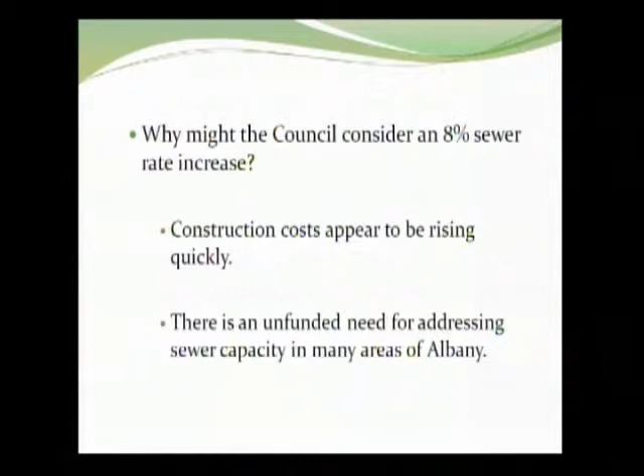Construction costs do appear to be rising. The Engineering News Record Index for this past year is over 7%, which is quite a jump. It's about twice what we've been seeing recently. And then as I spoke, there are unfunded needs out there, capacity issues with the pipes, and our issue down at the water reclamation facility that we need to deal with.

So if 6% will do to keep us on track for the 2.3, why would Council consider sticking with the projected 8%? The capacity improvements, while we don't have our arms completely around what those are, our early estimates say those will exceed $25 million in costs. If we don't address these issues, not only will we have sewer overflows, but we'll be hamstrung somewhat in being able to respond to economic development, whether it's a new industry or industrial or residential growth east of I-5. So we think it's important to keep that in mind.

So what's the impact for the average resident? At a 6% rate increase, they would see a $2.79 increase in their monthly sewer bill. And if we implement the 8%, it's about 93 cents more at $3.72 per month. Now I want to tell you a little bit about where the money goes. Connect what customers pay with what they get. So let's break down what they pay. So this is for sewer only. A 6% rate increase, they pay $1.64 a day. If we go with the 8%, they'll be paying $1.67 a day.

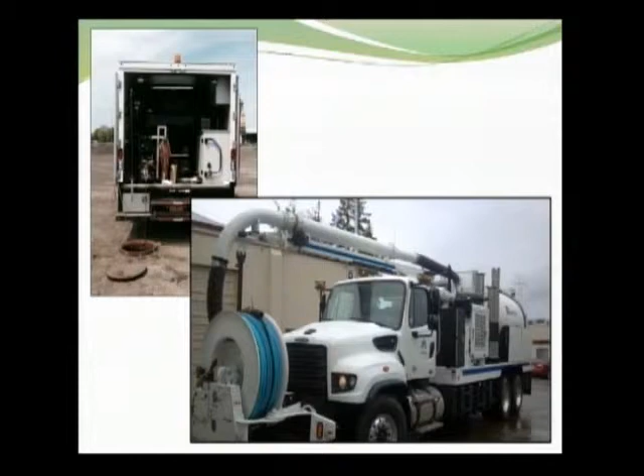The lower picture is a vac truck, and you may remember earlier, I think it was late winter, we brought a request to council for purchase of this replacement vehicle. On the left there, that's our televising van where we go in behind the cleaner and send an actual television camera down the line and assess the line.

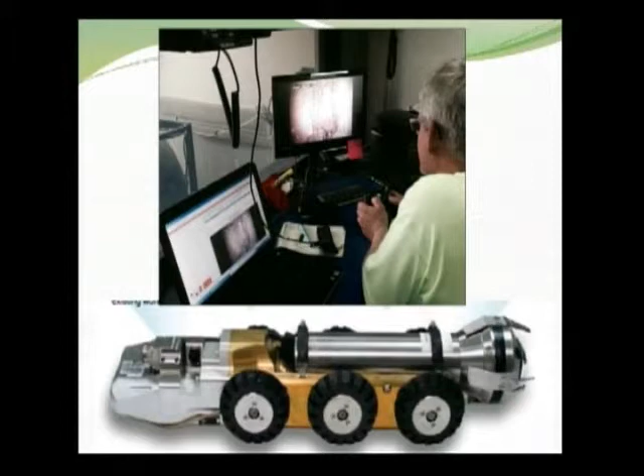And you can see there we have our crew member going through with the camera, noting deficiencies, noting where the sewer laterals are. So here's the graphic I was referring to.

And I couldn't get much more specific than that. But the work that our crews have done here, now we know what the condition of our sewer is. Our crews were trained on how to rate the pipe so that we have consistent ratings. And these ratings are national ratings, so we're being consistent with other communities. And we're able to prioritize where do we spend the limited funds we have - which pipes are about to fail, which pipes have maybe 5 years of service left, which are in good shape and we don't expect having to address them.

So in those 3 years, about 176 miles of pipe was surveyed. That's 80% of our system. And we've now turned our attention - this is just about all of our sewer collection system. There's some large diameter lines which we will be having inspected by a contractor over the next year.

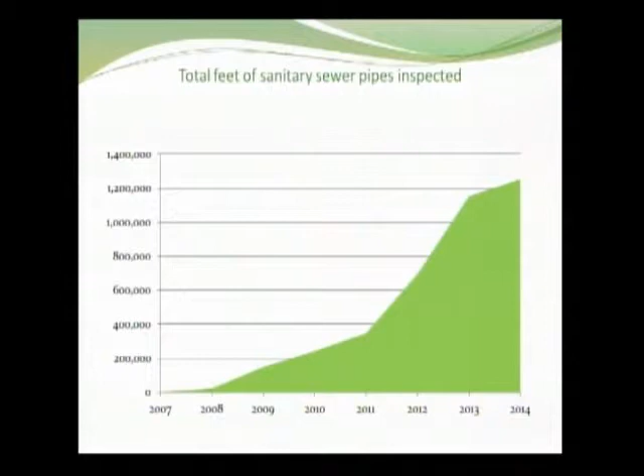We have a few lines that we just can't get down because of obstructions we're trying to address. But we're turning our attention to inspecting our manholes, because that's another place where you can have infiltration and other issues, and you'll see what can happen with issues at a manhole.

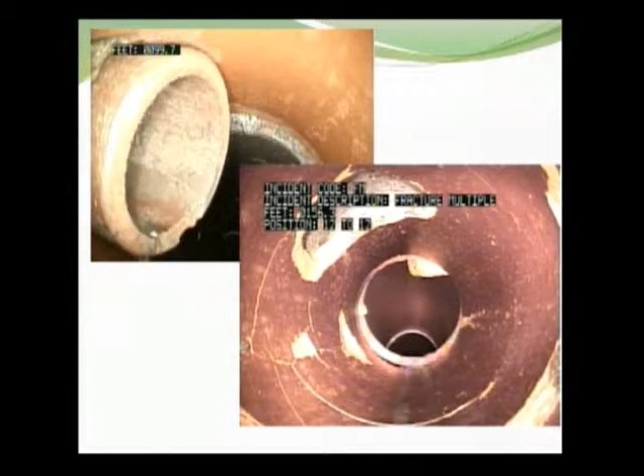Here's some pictures of Albany's sanitary sewer system. As you can see, there might be some problems with these pictures. On the left-hand corner, that's called a protruding tap, where a sewer service or side connection has essentially been stuck in the pipe, causing an obstruction. On the left, you have roots in a pipe. The upper picture on the right is actually a bend in the pipe, not at a manhole, a good place for things to hang up and cause a blockage.

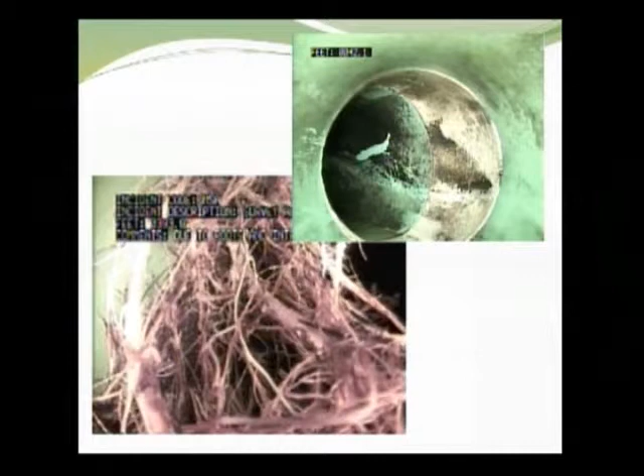So we have issues out there. As I told you, we use specific standards to rate the pipe. I won't go into all the detail, but almost 65% of our pipe is unlikely to fail in the foreseeable future, because of its current condition. We have a little over 1% of our pipe actually under repair right now. That's where that $2.3 million is going, to try to replace and repair these pipes.

We have another 7% of our pipes that are most likely to fail within the next 5 years. We're trying to knock off those and get to those most severe pipes that might fail, cause blockages, have sewer back up in basements, pour out of manholes into creeks or streets. So that's what we're targeting, those potential failure places.

Here's a map. We're able to map where these deficiencies are. Again, we've come a long way in 3 short years. A real nice tool of being able to map this is, as we look at our capacity issues, we can overlay where we have capacity issues, where we have structural issues, and that helps us prioritize how to spend those limited dollars, where we can address both capacity and structural issues.

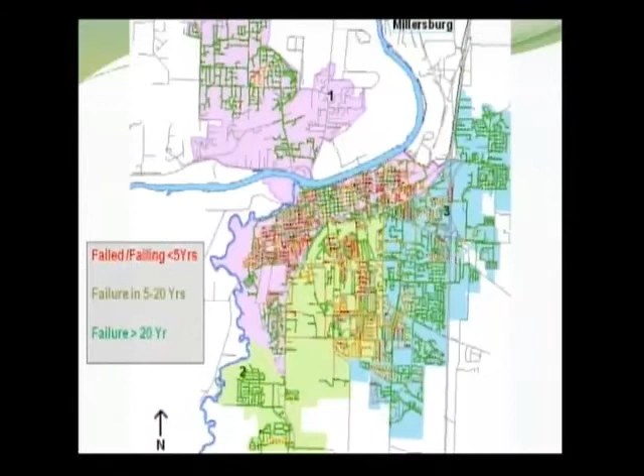I think I see my backyard as the first 5 years. That may be comforting.

So here's some information we've gathered so far on our manhole inspections. We've just initiated this effort. We've gotten to all but about 40% of our manholes, or have attempted to. We have a few that are buried that we can't get to, that we've got to address so that we can do the inspection.

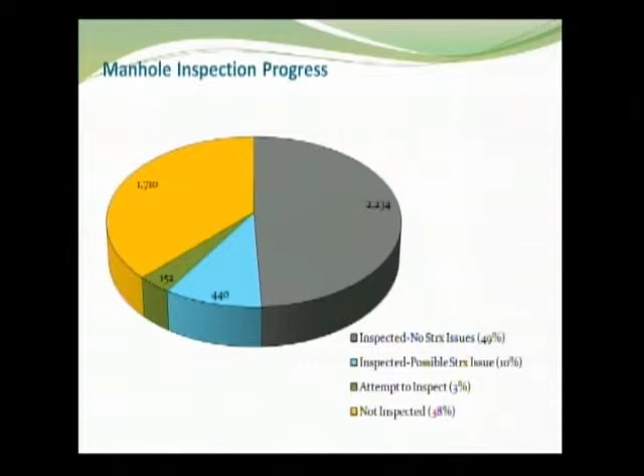Really, the inspections almost have to be done twice. One is in the summer when the flows are low, and you can see if there are issues all the way down to the bottom of the manhole. Then in the winter, when the groundwater comes up, you need to do another inspection to see if there are places where water and infiltration is coming in that we need to address. It's quite an effort to get to all these manholes, but we will have data on those manholes similar to what we have on our pipe system here within a year or so.

So we respond to almost 300 service calls a year. We respond to almost 3,000 service line locates. Here's one of our Vactor trucks. This was a sanitary sewer spill. We had a force main that broke, and we had raw sewage on the ground. They're out there responding.

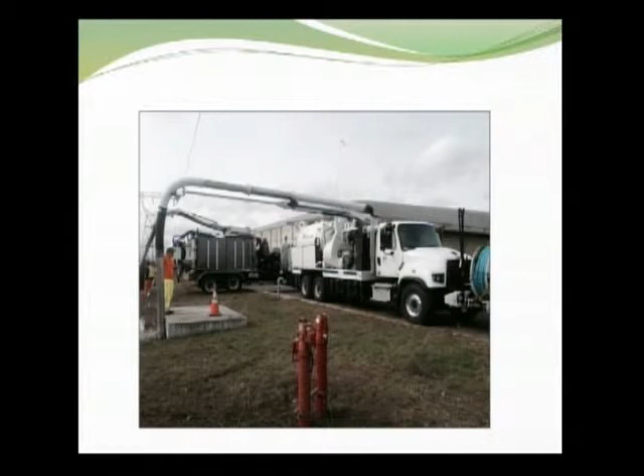We treated almost 3 billion gallons of wastewater in 2013. Low flows can be around 6 million gallons a day, and high flows can be 60 million gallons a day. Our crew at the water reclamation facility—you could call them zookeepers or farmers—tend to billions of organisms helping clean up our wastewater, making sure they're happy and healthy. They're doing proactive maintenance on pumps and other mechanical systems to keep things running, because we can't just wait for things to break when we're getting 40 million gallons of water hitting the treatment plant.

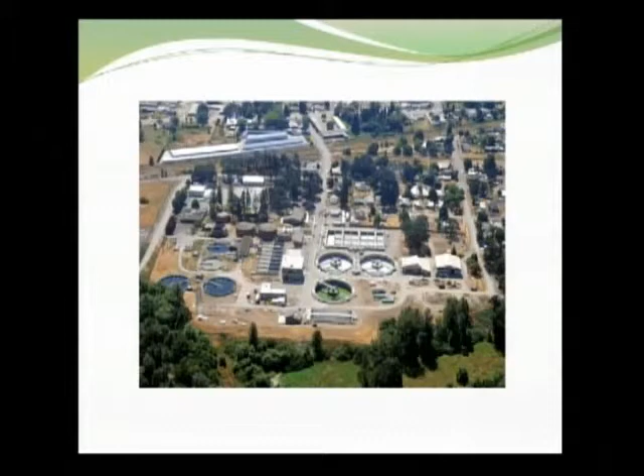We're also operating talking water gardens. That's a new thing for us. We're into about year 3, and we're still learning what it takes to operate that on a yearly basis, working on getting the plants established out there. There's our treatment plant under construction, and the wetlands out there.

We also maintain 11 sanitary sewer lift stations in the city of Albany, and by contract we manage or operate 4 lift stations for the city of Millersburg. Our mechanics, electricians, and control guys are out there responding in inclement weather. Just because it snows or the power goes out doesn't mean we can go home—we've got to make sure we don't have sanitary sewer backups and overflows.

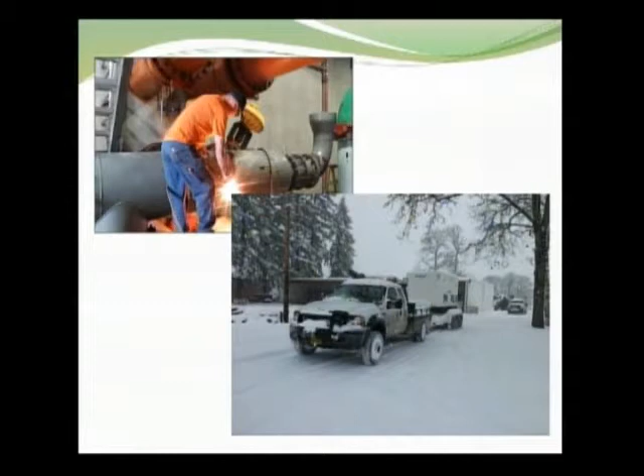We also run an industrial pretreatment program in accordance with DEQ regulations. I think we have 17 permitted industrial users that we monitor monthly and work with. We respond to code enforcement issues, believe it or not, and we support our stormwater water quality programs.

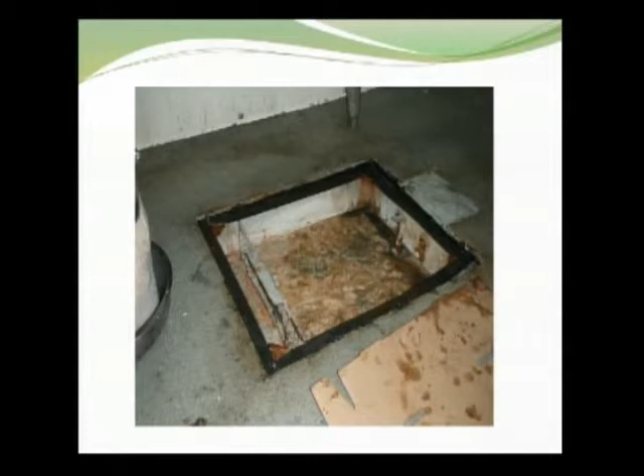This is part of our industrial pretreatment work—not a pretty picture, but it's things we deal with on a daily basis. Code enforcement involves going out and addressing issues with illegal discharges and things like that. Here we had a paint spill into our storm drain system.

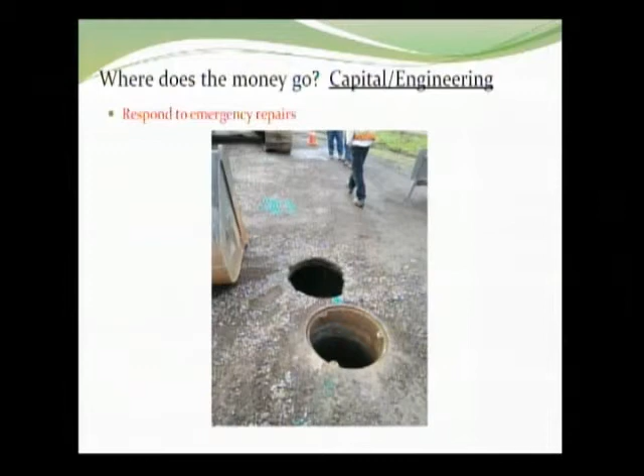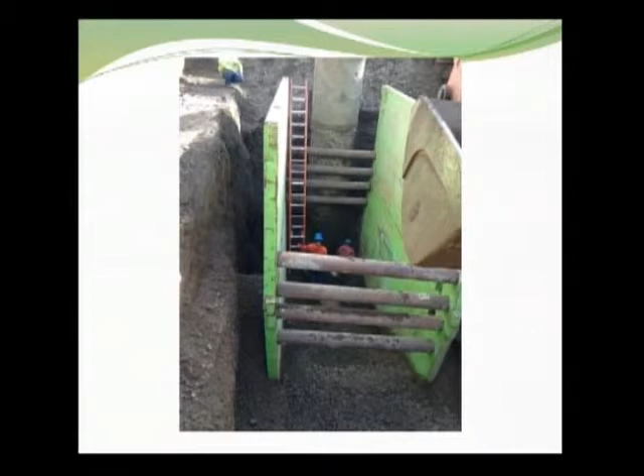You remember I mentioned you can have issues at manholes—here's a good example, moving into what we do on the capital and engineering side. This took place, I think, in February. This is a manhole along our riverfront interceptor, which serves a large portion of the city, taking lines from the downtown core area and transporting waste down to our wastewater treatment plant. A sinkhole opened up here, and we jumped on that, bringing a contractor on board. We worked over 36 hours to get this done—you can see it's a huge issue. We had a line break or sever right at the manhole, which brought in all this material. We worked late into the night to get things restored.

In addition to responding to emergencies, which we hope to reduce by investing in our system, we invest by replacing private sanitary sewer laterals. This is a city program that almost all residents are happy with once it's done, which is fairly unique for a city program. If someone has a failing sewer lateral and it meets specific criteria, the city will go in and replace that line one time. We have a lot of happy customers who use that frequently.

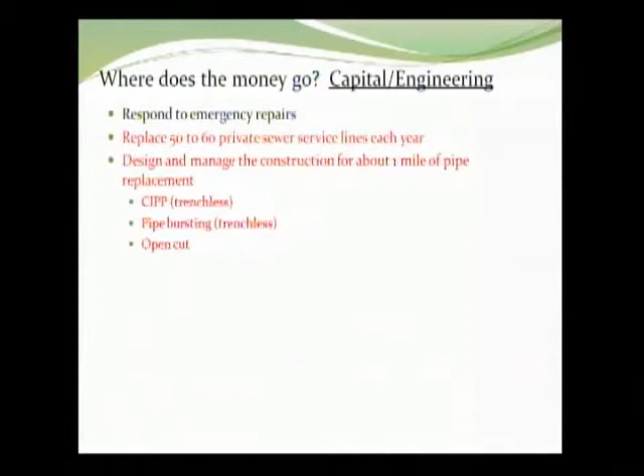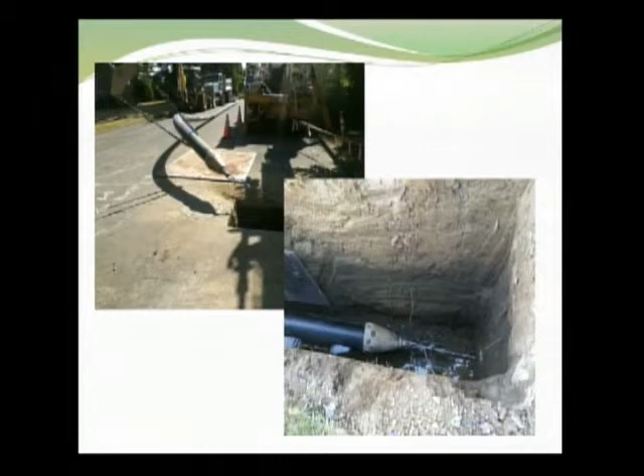In engineering, we also manage the city's response to water quality regulations. We have staff involved at the state and national level trying to keep our pulse on regulatory issues, minimize financial impacts on us, and make sure those regulations are attainable and reasonable. We try to be proactive in managing that, though obviously we're not in the driver's seat. We update and maintain our sanitary sewer system model, which is important to show us where we have capacity issues. We review development proposals, respond to citizens' inquiries, and bill 17,000 accounts monthly—that's billing and processing payments.

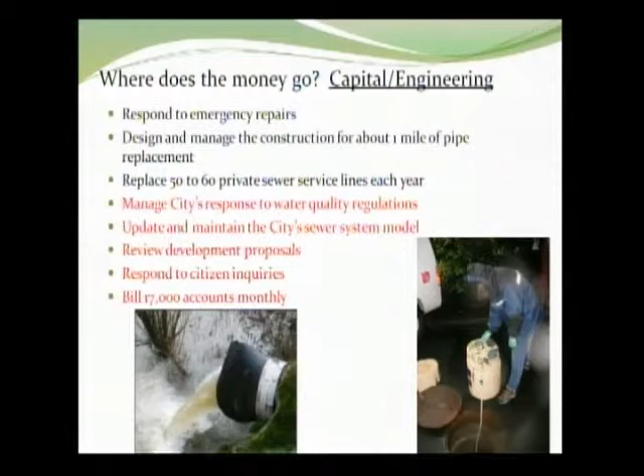So we do a 5-year rate projection for you each year. You know, we keep that rolling through. We look at revenues, anticipated revenues and expenditures. And again, those are just anticipated, and things can change.

On the revenue side, our biggest horse pulling the cart is our rates. SDCs come along second. Those are very much development driven. We get a little bit from fees, and that's really our funding source for addressing all these issues: our debt, O&M, and capital needs.

So the budget that you approved estimated that we're going to get about $14.25 million. That was based on a 6% rate increase. If an 8% rate increase is approved tonight, we hope, assuming all the other assumptions stay the same, we will see an increase of over $200,000 in revenues.

Those funds will be placed in capital reserve to be able to address capital issues as they come up and build those reserves to address the structural issues and the capacity issues.

Question. Yeah. According to the financial sheet, we're now at 101% of revenue for the year. Is that? I haven't looked at that, but that could be. We have one more month to go. We have a partial month.